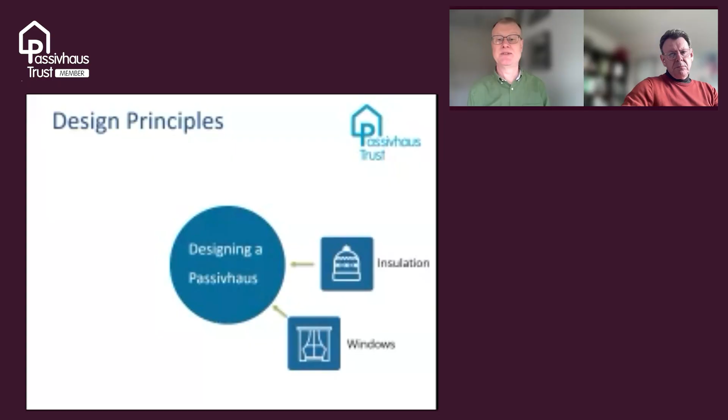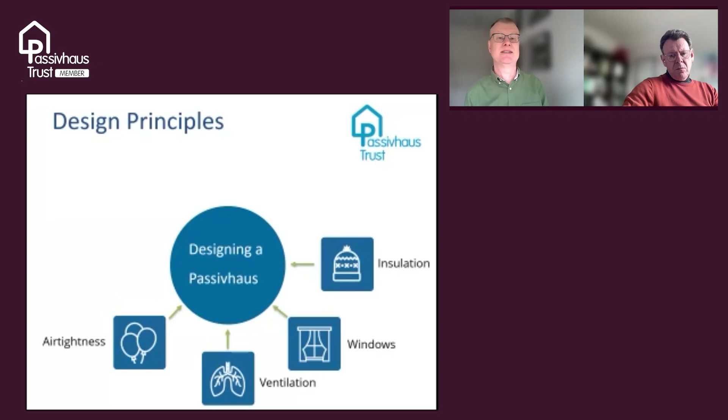A good ventilation system to make sure you've got nice quality air and you're trying to retain as much of that heat in the ventilation as possible, so you're not losing all that nice warm air out the window. Air tightness, really important, making sure that you're not having any heat loss through the drafts. But also, this means that the quality inside is much better, so there's less drafts, better control of humidity and other things.

Thermal bridging, this is one that's often misunderstood, and particularly important in terms of your retrofits. So this is where you've got elements of the building that might transmit heat from the inside to the outside through what's called a thermal bridge, which is kind of like if you have a concrete beam or a steel beam that runs from the inside of the building to the outside. Heat will just go straight through that bridge, and that will do two things. One, it will lose lots of heat and energy. The second thing is, it also means that surface temperature inside is going to be very low.

So if you had maybe a 1960s house with a concrete beam above your windows that is also expressed on the outside, you'll probably know that's the case because you'll have a nice moldy patch above your window where that concrete lintel just spans between the two, and that heat is basically being transferred straight out, so you've got a cold surface. So reducing thermal bridges is really quite important.

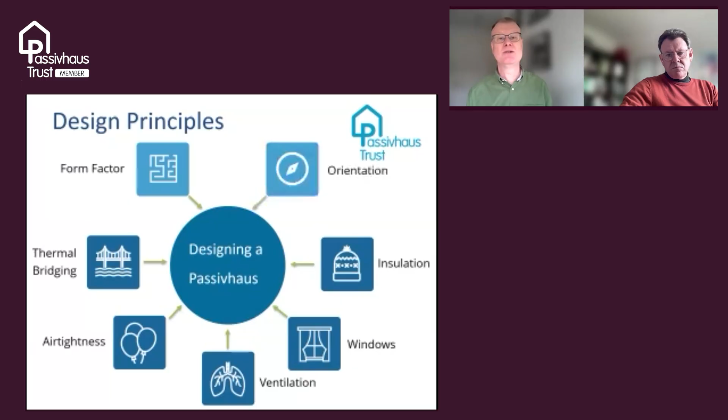Some other principles that you may not be able to do quite as much with if you're doing a retrofit compared to a new build would be things like the form factor, which is the shape of the building. Basically, it's the surface area that's losing heat. So the more compact the building is, the less surface area, the less heat loss. You can do a few things with it, but usually it's fairly limited with the existing building.

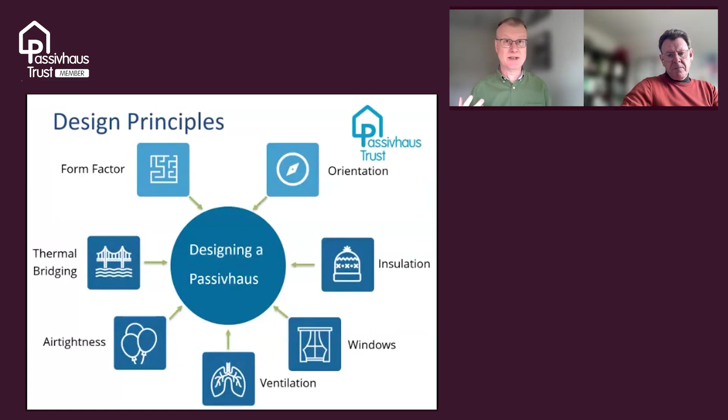And orientation. So ideally, you'd face the rear of the building to face south, not only just for solar gains, but also for keeping it cool in summer. But with an existing building, you probably can't do that.

So retrofit, really, really important. People might know this already. Ideally, by 2050, we're all going to be zero carbon. But all the buildings now are going to still be around.

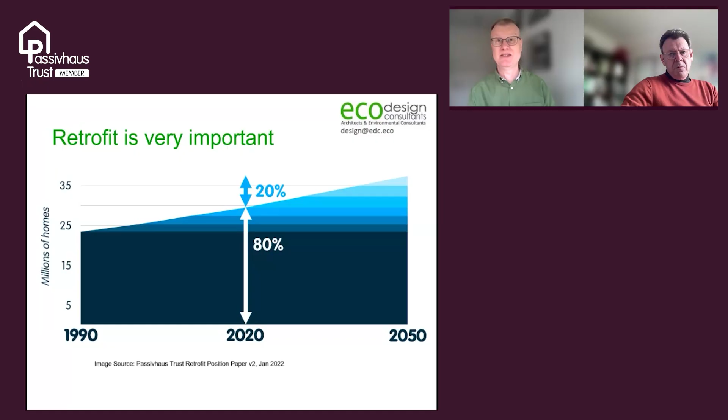80% of the buildings now are going to be still around in 2050. So we need to do something about the existing buildings as well as the new builds. In terms of performance, this is one of the things I really love about Passivhaus and why I'm such a great fan of it.

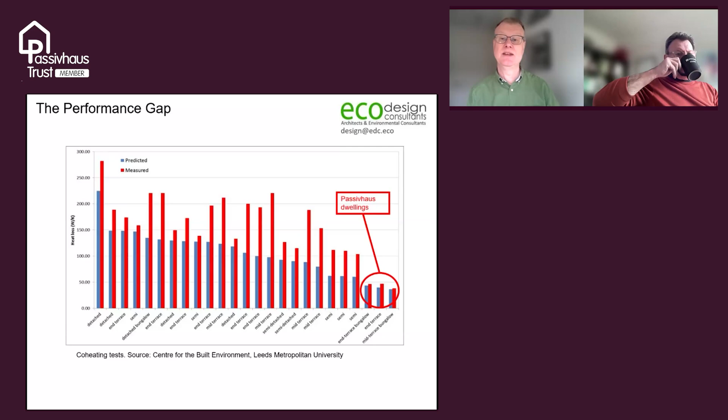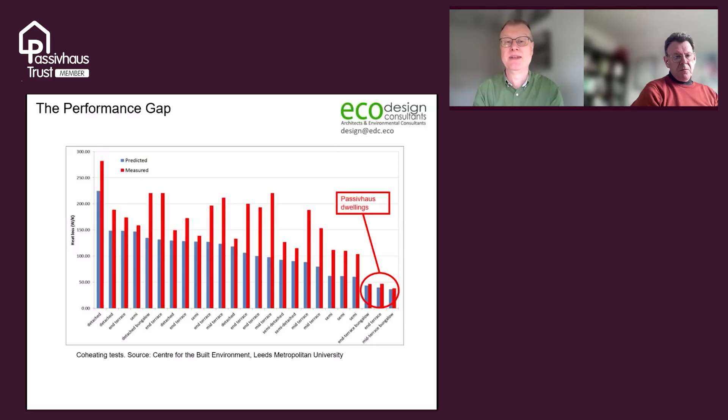But at the bottom corner, you can see the Passivhaus ones really much closer to the predicted, and also much, much lower as well in terms of overall energy use. So what's shown time and time again is that the Passivhaus methodology does what it says. And more recent studies by Oxford Brookes have also come out with similar findings to say that Passivhaus, in terms of the calculations, is much more reliable than some of the other energy calculations. So that's why we love the Passivhaus.

So a big question people often ask me in terms of retrofits is how far should we go? Should I just do a shallow retrofit or should we do a deep retrofit? So a shallow retrofit is when you might just do a bit of extra loft insulation, little bits here and there, basically. It can be good in terms of getting your carbon reduction down, but it has limited benefits to the health. Like I said before, it's about trying to get the surface temperatures up and stuff like that, but it just won't do unless you go for the more deep retrofit.

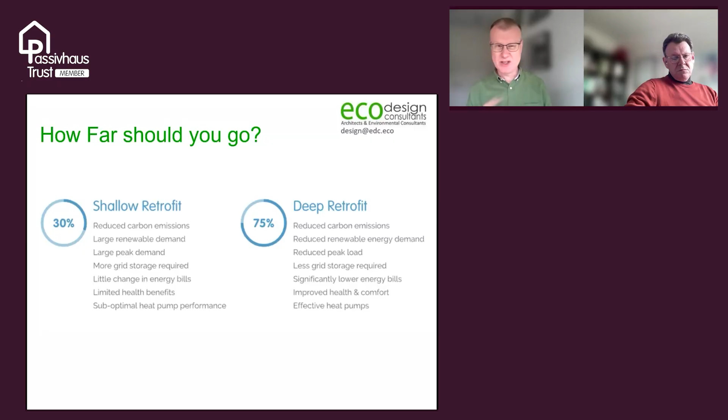Also, in terms of deep retrofits, you get much better in terms of a community, in terms of reducing power loads in different times of day and between summer and winter. So it's much better in terms of the country overall if we went for deep retrofits, but I won't go too much into that now, to be honest. We can talk later in the questions.

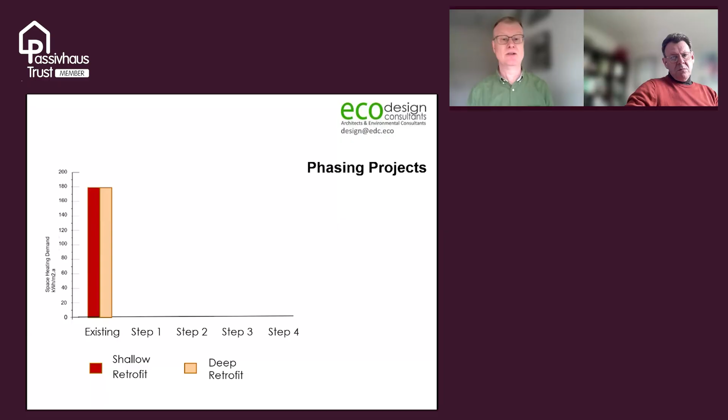So for me, what's really important is, first of all, having a whole retrofit plan, but then maybe phasing it. So for me, like in my house here, I couldn't afford to do the full deep retrofit in one go. So the options were either a shallow retrofit and being locked in, or going for a deep retrofit and doing it in stages. And that meant that I could keep going and doing stuff. So it's much better in my mind to do one item well and not have any regrets.

So for instance, if you're doing external wall insulation, putting on the full 200, 250 millimeter insulation now, rather than going for 60 millimeters, because that's the most economic and you can afford at the time. Because then if you want to do it later, you're going to have to redo all the render and all the rest of it, which is, to be honest, the majority of the cost.

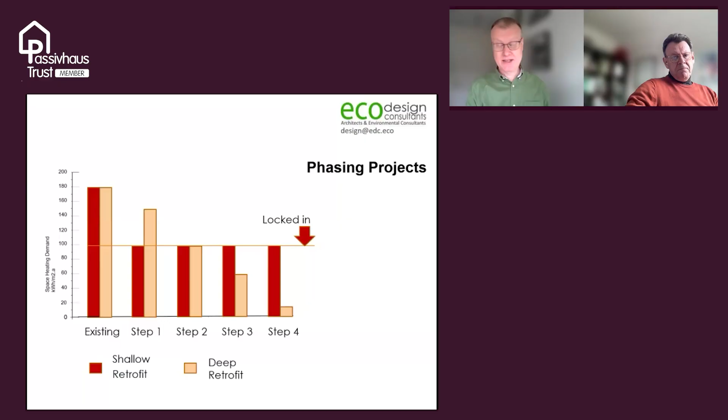The actual cost of going from 60 mil to 250 mil isn't that much. It's mostly involved with the material costs. So it's not a huge step up from that lower level. So it's much better to do each individual item well than lots of separate bits to a lower standard.

So going into the whole house plan, and I will go into some project stuff very soon, you'll be pleased to know. So if you look at our process, you can download this from our website.

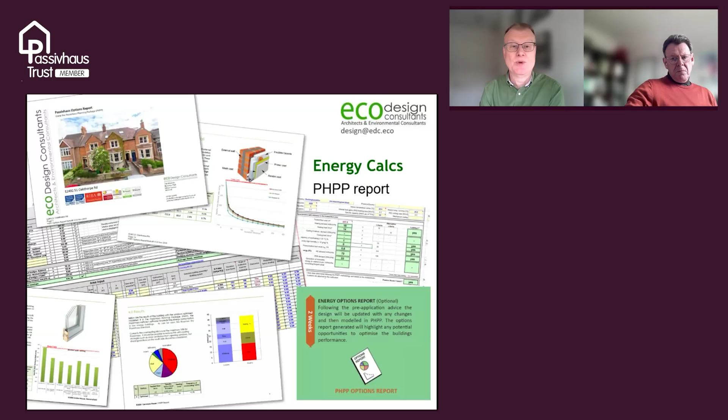So Guy's and Susan's house. So we gained planning permission and we provided a comfortable and healthy house with low bills. So a quick video now, hopefully this will work. So this is Guy's house as it was originally from the outside, and inside you can see fairly standard. They moved in just over Christmas, you could tell, and the back garden slightly overgrown. So a fairly standard terrace house.

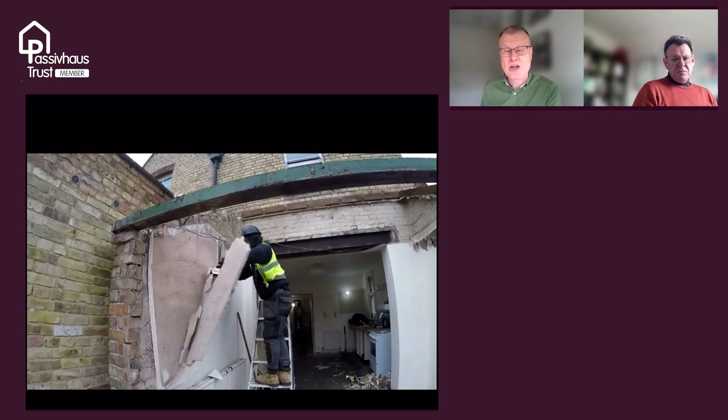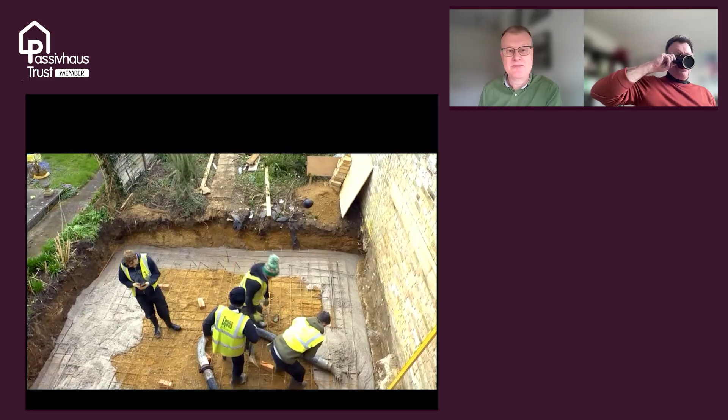So we pulled down the rear extension, which wasn't very good. One of the reasons for doing that was to fill up that silly gap between the extension and the neighbour's house, so that was losing heat and space, and was one of the changes we did from the original architect's drawings. So the foundations are going in there, the rear. Some structural beams we moved up, particularly in the basement where the ground floor was quite low. So moving the beams up was helpful.

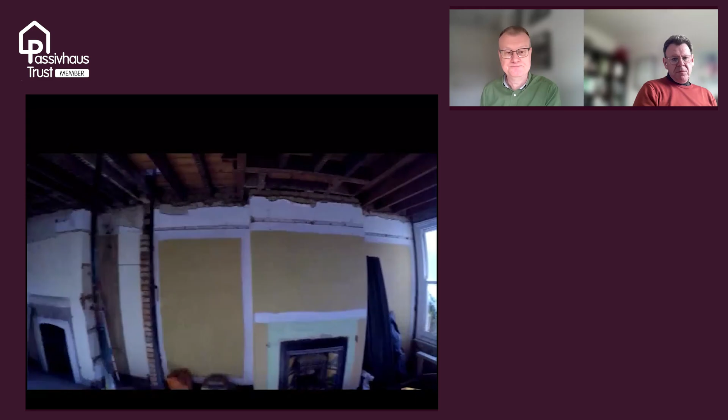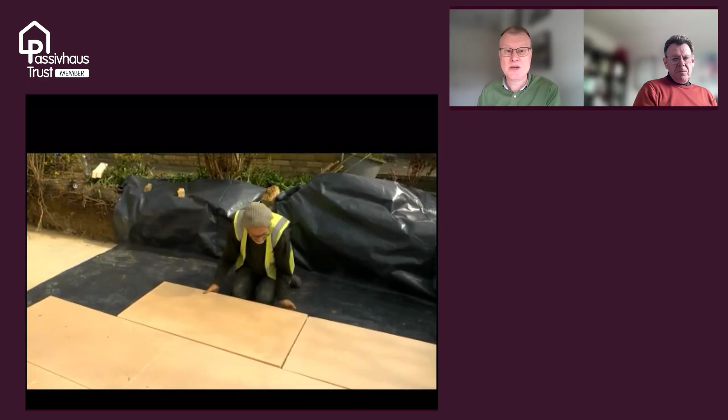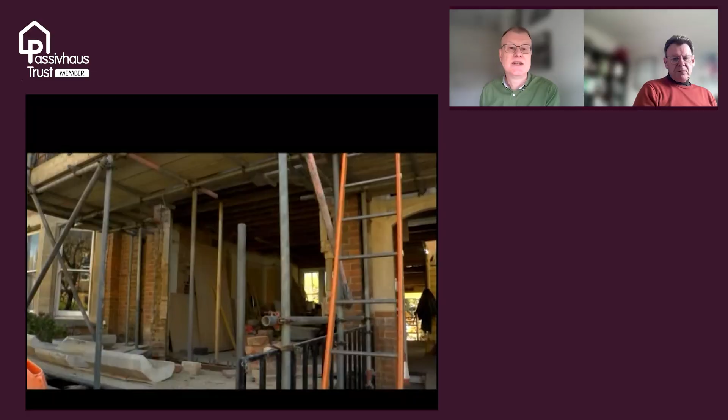Stripped out the house completely. You can see there all the brickwork back to original. Some of it, including that front bay, wasn't particularly great. Here you can see some of the insulation going in for the floor of the extension, the roof being amended, and the extension going on. So at the front, you can see there the bay window had to be completely rebuilt because once we opened it, stripped it back, it just wasn't structurally safe. So it ended up being rebuilt.

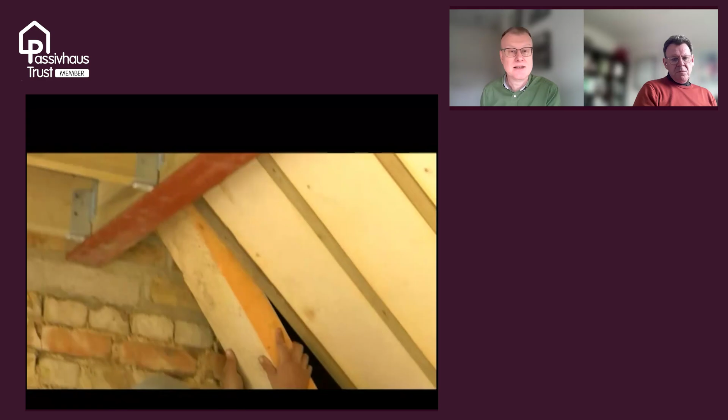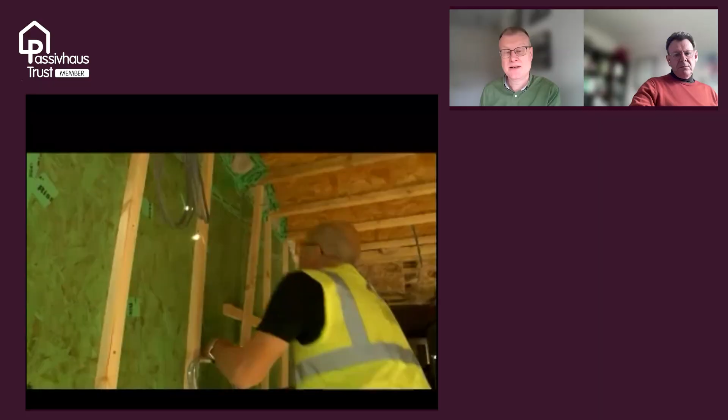Small extension on the back, some insulation going into the roof. So slightly different strategies for the front roof to the back roof because we need to keep the insulation level at the front and at the back. On the walls, inside the front walls, we used a combination of lime and cork render, wood fibre and a lime plaster. Ventilation going in, some air tightness tapes. So the rear, you can see a green air tightness board there at the back and lots of air tightness tapes. The windows being replaced.

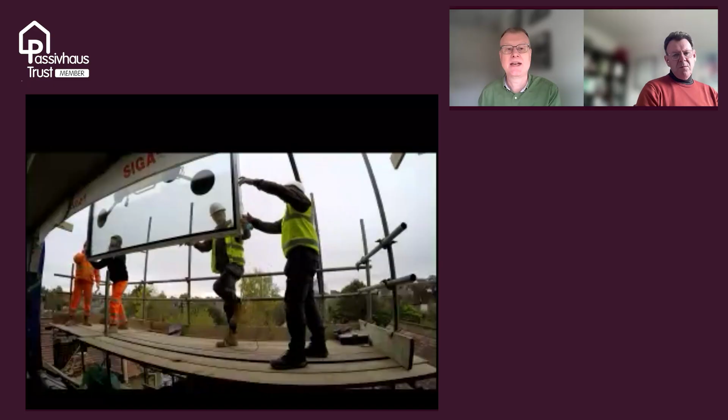So these going into lovely new triple glazed windows. You can see them going in there. So though they look like sliding sashes, they're actually open at the top, but look fantastic. And you can see the windows there in place and the wood fibre insulation going in. At the rear, at the back, we had a large glazed window that had to be craned in. You can see it going in.

So this is the top floor bedroom looking out the back, finished kitchen, finished living space, which we opened up through to give a lovely space, and a view out the rear extension from the dining space into the back garden. That's a quick whistle stop tour.

Okay, so just moving on to some of those points in detail. So we often talk about Passivhaus as 5 principles. So here I've got 8 principles. So I'm going to quickly go through what we did on each of the projects. So number 1, the insulation. So you can see here the rear extension, which was a timber frame with mineral fibre insulation going in between the studs. So it's a big duvet over your house. Not necessarily as much as people think to the Passivhaus standards.

So if you're doing a new build, it might only be a little bit more than current building regulations. But compared to an existing house with no insulation, obviously quite a lot of insulation going in. To me, it's important what insulation you pick. And there's a whole topic that I'll talk about in terms of what insulation goes where. But you want to make sure of a couple of things. One, it's continuous. You don't want gaps.

Often we think that soft insulation is easier because it can squash into those gaps, as you can see there. And it's really important to make sure you get what you're asking for, because you need to check the thermal conductivity or the lambda value to make sure it's the type of insulation that you want to use and you aren't getting something less performing.

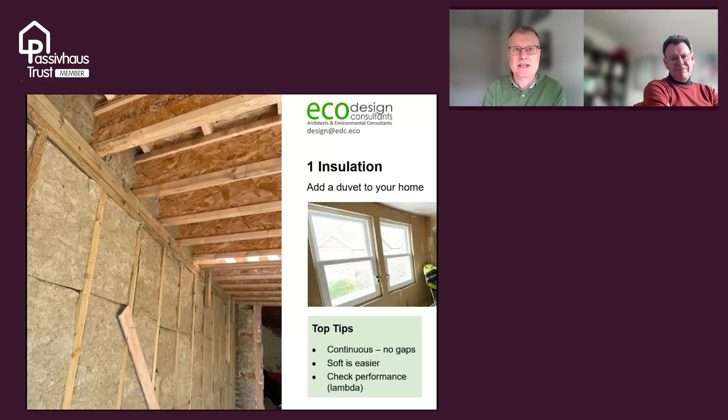The second thing is efficient shape. So it's very important that you look at what I called earlier the form factor. So just a quick example there, we've got a mid-floor flat and a bungalow. If you opened up those buildings and showed what the heat loss area was, the bungalow there has 279 meters squared of heat loss area. And the flat, because it doesn't lose heat to the flat below and the flat above or to the communal space, has only got 74 meters squared of heat loss area.

And both of those properties are built to current building regulations, same U values, same everything else. The mid-floor apartment is 2,000 kilowatt hours to heat. The bungalow, 4,500 kilowatt hours to heat. The only difference is the shape of the building. You can see clearly the bungalow requires over double the amount of heat. So making your building as compact as possible really does help in terms of reducing your fuel bills.

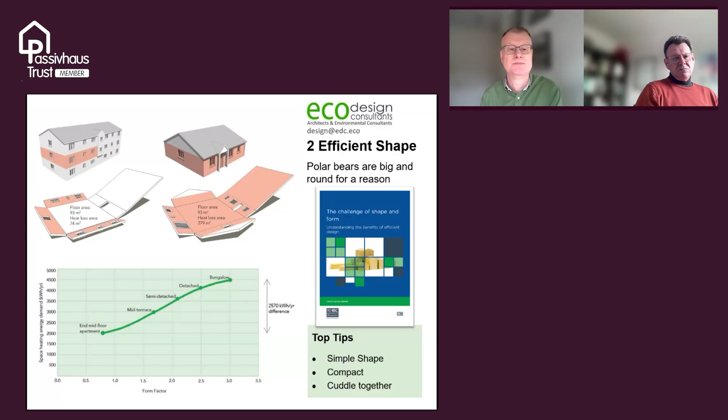So on Guy's project, you can see here, this is the new rear extension that was rebuilt and extended at the back. One of the things we did, which you could see briefly in the video, was we built it right up against the neighbours. So we used the party wall. We didn't leave what I often think of as a silly little gap between your extension and your neighbour's extension, which will just fill up with leaves and cause damp problems, but also hugely leaking moisture and heat. So that was one of the large changes that we could do to make it more efficient.

Other things we often do are things like the location of the front door. This one is recessed, but we felt it was undesirable to move it to the front surface because of the aesthetics. Often we would move that front door, the thermal envelope, right to the face of the building to reduce those losses.

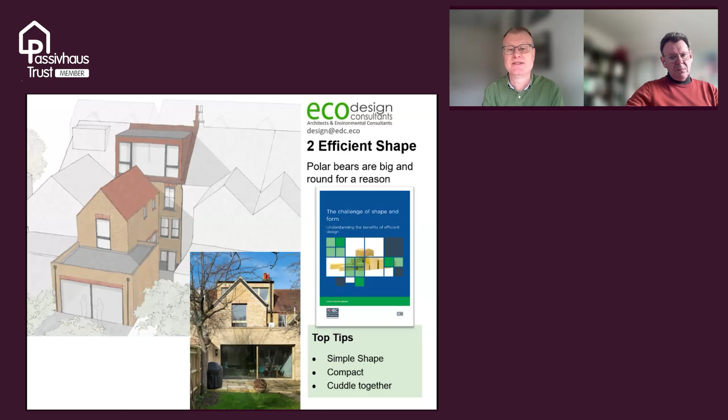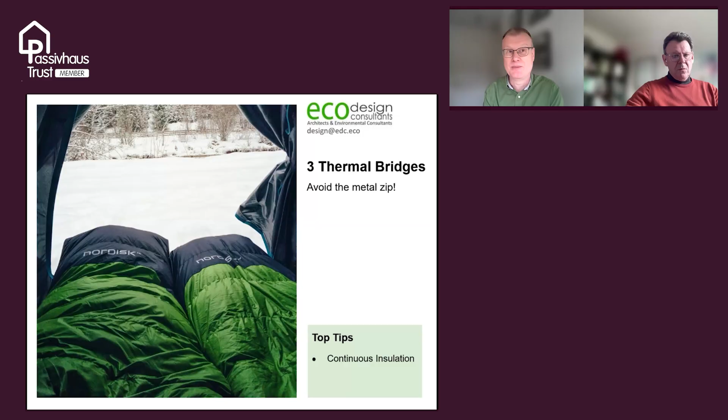Third item here is thermal bridges, which I spoke about briefly in terms of the steel. Some of you in the audience might remember the old sleeping bags with a metal zip, which was horrible. That is a thermal bridge. Now plastic zips help reduce that thermal bridge. In houses, those thermal bridges can be all over the place. Typically insulation is soft and squidgy and not so good in terms of structure. So typical difficult areas are around the foundations, around the roof, areas where you need structure as well as insulation, and just try and keep that continuous insulation.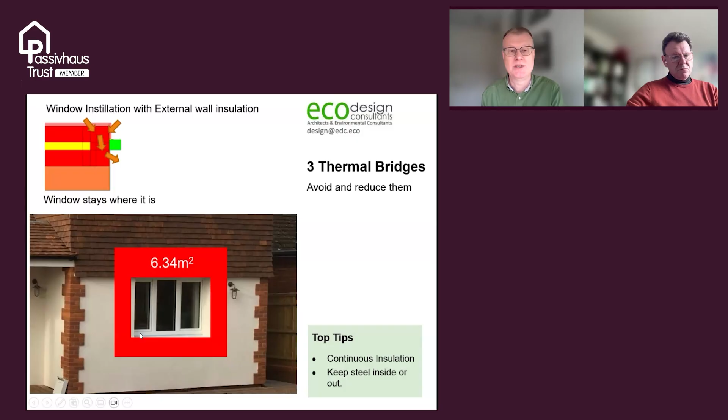So 6.34 meters squared around that window. So it's a huge area of losses compared to if you did move it out. So if you moved it out into the insulation, reducing that thermal bridge and reducing the surface area of the building, that then reduces down to 0.34 meters squared. So you can see a huge difference in terms of energy losses.

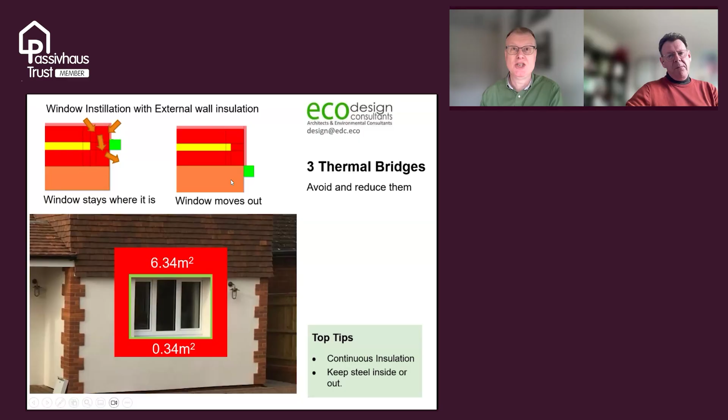But to be honest, to me, what's much better is that internal surface temperature. So there's the reduction in terms of risk of mold and condensation and discomfort really from the inside. So these sort of details really make a huge difference in your retrofit and are really important.

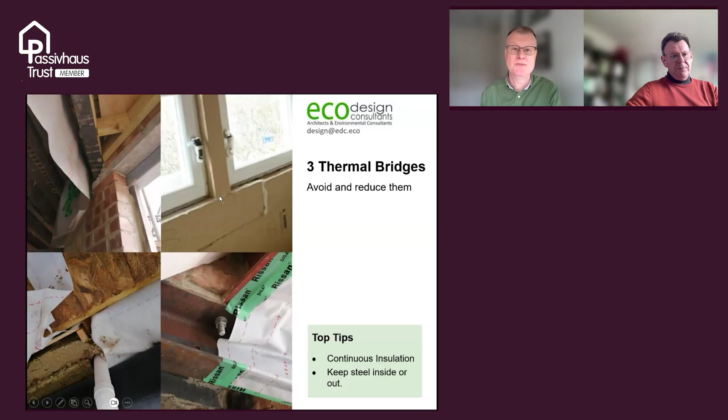These are some of the examples of what we did within Guy's house. So lots of it's where the steel was, so some complicated details that needed detailing. You can see here the windows with the wood fiber insulation going on, wrapping over the frame to make sure that the insulation and the window frames really do join up.

So point number 4, drafts. So this is about your air tightness. This is about making sure your building is airtight. But one of the important things to remember here is moisture movement. And moisture is really one of the enemies within your building, and particularly with the retrofits you need to be careful how this works.

So getting this to work is, to me, a bit like comparing the old cagoule with the new Gore-Tex coat. So the old cagoule, you go out walking and you'll be really sweaty and damp inside your cagoule. If, however, you now have a nice Gore-Tex coat, it will let moisture through. So water vapor is a smaller molecule, and that will be able to go through small holes, whereas air and heat, which is a bigger molecule, is trapped inside and won't get through.

So a lot of membranes and other building materials are vapor open. So that allows water vapor through, but it is also airtight. So it doesn't mean that heat and air can go through. So some nice clever membranes and stuff we use now. There's also things like lime plasters and a lot of the natural materials which are actually vapor open and also airtight. So it's not necessarily using plastics and other things like that.

So we do need to be really careful about the materials we use in terms of how moisture moves backwards and forwards through the construction. And that's something I really need to stress in terms of what you're trying to do in the retrofit. Particularly, I would discourage people using things like insulated plasterboard on the inside, which is vapor closed, which won't allow that moisture through in the way it needs to move between inside and outside at different times of year. Sorry, I'll get off that soapbox now and move back onto the air tightness.

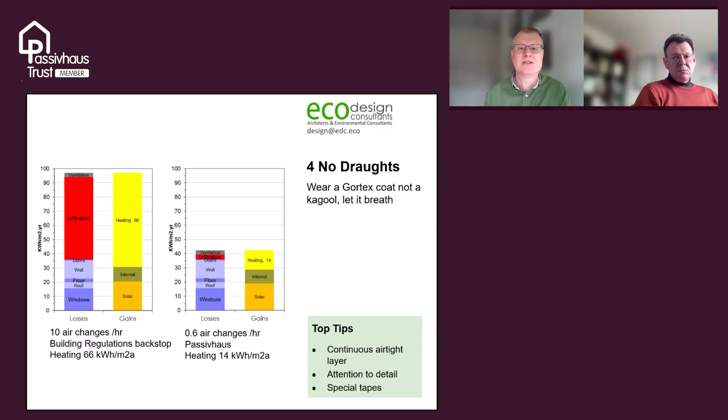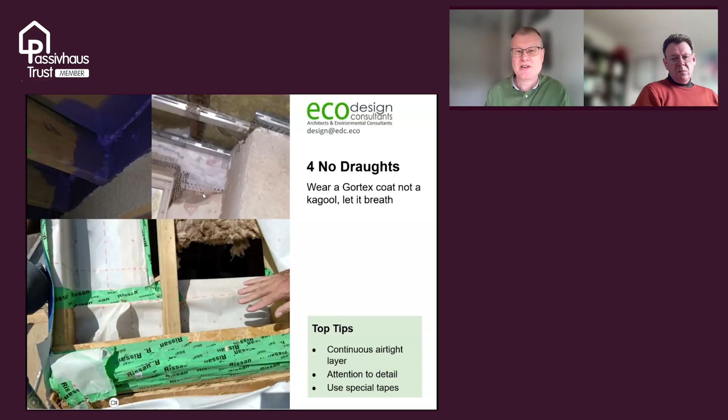And here you can see some of the other membranes and tapes. So this is one that you can plaster onto. So this is where the membrane was then taped to the wall. And then that allowed us with the lime plasters to be taped onto it and make sure we've got a continuous airtightness layer. So it's really important to use the right materials in the right places and think through the strategy. So once you've done that, you basically need to test it.

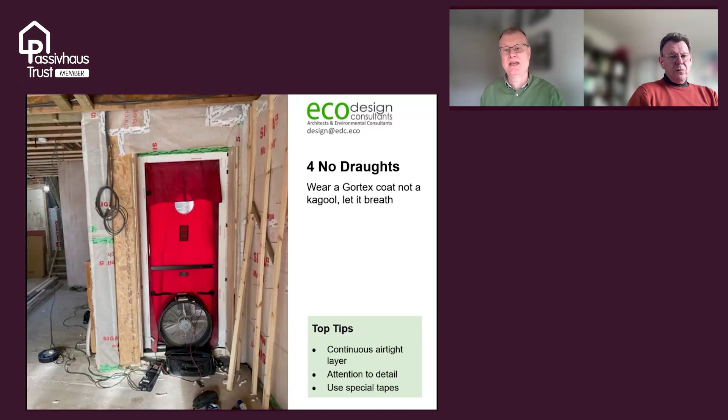So here you can see the rear extension. You can see the airtightness membranes and the tapes around the building. And so what it meant is that when we do the test, we can go round and we can find holes. And if you find a hole, we can tape it up and put it right. And we can keep doing that till we get down to the level we need to.

So once you've got a nice airtight building, it's really important to make sure you've got good quality air. Because obviously, if it's an airtight building, you will breathe out and carbon dioxide will come out of your mouth and you'll build up carbon dioxide in the building, which can be dangerous after a long time, but only a very small amount. And it's days before it becomes really dangerous, even in the most airtight building, but we won't go into that particularly. So you need to have what's called mechanical ventilation with heat recovery.

What happens is the stale air and the fresh air pass next to each other, and about 80 to 90% of that heat is transferred from the stale air to the fresh air. So what that means is the air might be 0 degrees outside and 21 degrees inside. As it goes through the machine, the fresh air coming into the rooms might be up to 1 degree less. So if it's 21 being extracted, it might be 20 degrees being supplied into the rooms, but not the 0 degrees of opening the window.

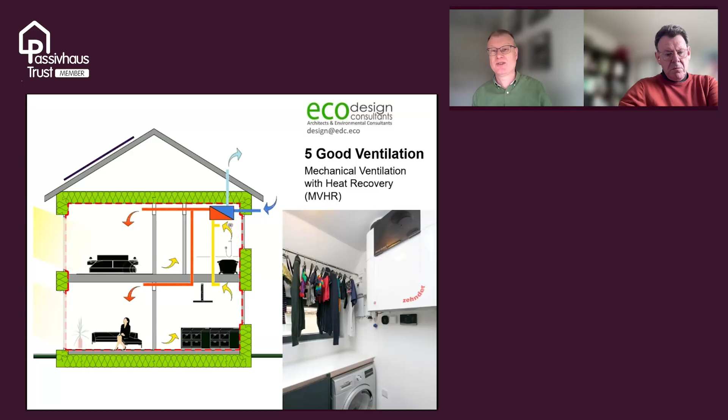A similar thing works in summer, and it can help either bring in cold air from the outside or use it as a heat exchanger to keep your house cool as well. But I won't go too much into that today. Often people think that putting in rigid ducts around the house is quite difficult. And so there's lots of ways we hide them away.

So the hallway here, you might spot is slightly different, and we have a slightly dropped ceiling in the hallway. That's to allow some ducts to come through, and we've got outlets above the doors on the first floor. So there's a few tricks like that we can do to try and hide away those ventilation pipes, which is often much easier than people think it's going to be in terms of the distribution of those ducts.

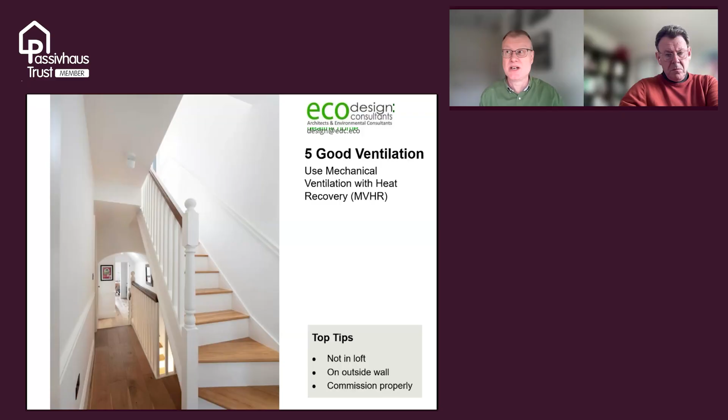Tips here: don't put your MVHR in the loft unless it's accessible. Put it on the outside wall because it's basically cold air coming in and out of it. So those ducts want to be as short as possible, and really do make sure you design and commission it well. The design of it is really, really important in terms of sound and other things, and that's where Passivhaus really shines in terms of its requirements and its quality checks to make sure that that works.

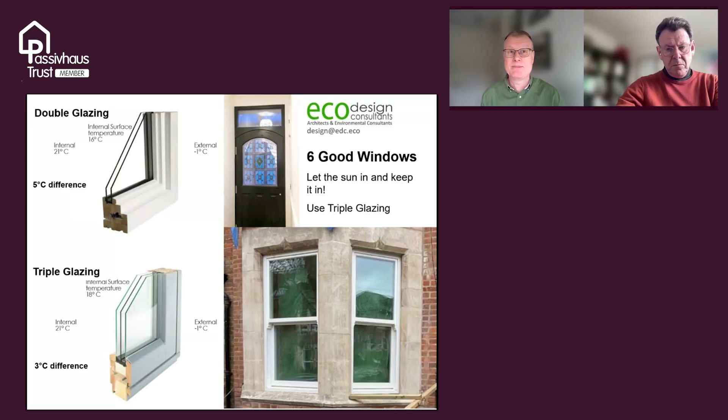One of the other nice features that we did with Guy, he had a fantastic old Victorian stained glass window in the front door. So we actually reused that and encapsulated that within the triple glazed new front door. You can see in the picture there.

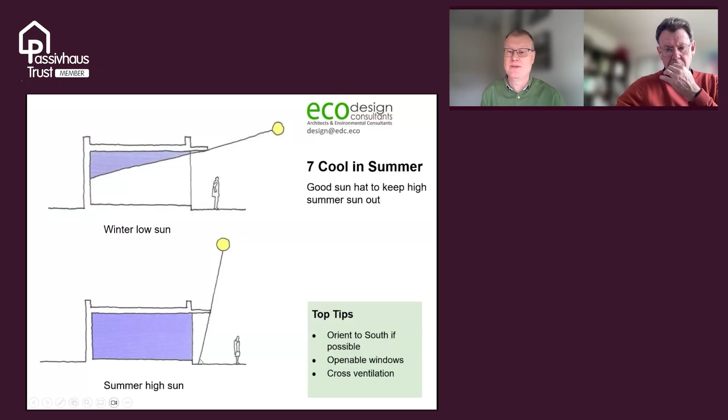Keeping cool is important as well as keeping warm. In summer, the building basically acts like a thermos flask, so it keeps things warm and cold. So one of the things you can do is you can try and use shading. So if your windows are facing south, you can have a shading device that lets in the low winter sun, but shades out the high summer sun. But also there's various ventilation and other things we can do.

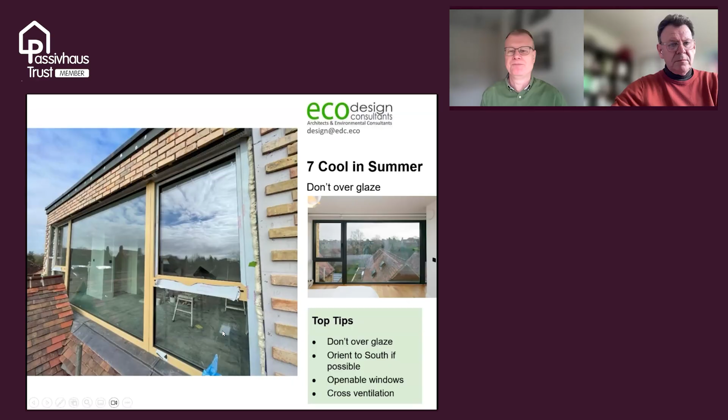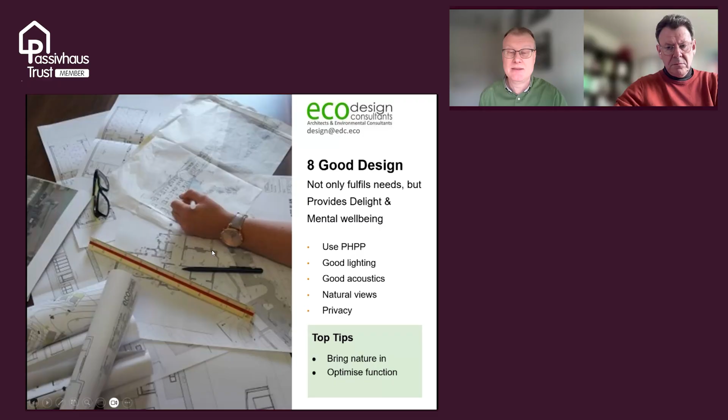So point number 8, it really comes down to design. I think taking the passive house stuff and the building physics is great, but you also want to make sure the building works functionally. Also look at good lighting, acoustics and views and all the other design things that you need to think about. So try and bring those all together. And I think it is worth thinking about those things and the future. So making it future-proof in terms of accessibility and other things. So maybe go a little bit further than just the standard passive house requirements.

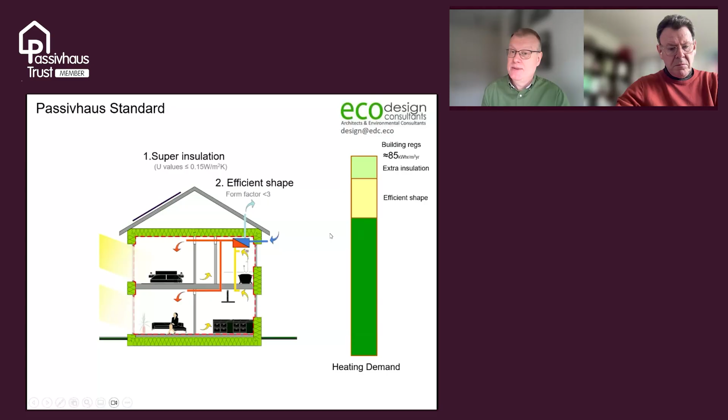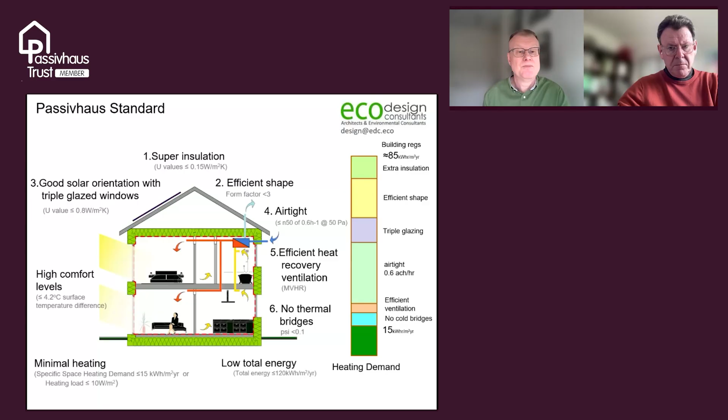This is for a new build passive house, but the retrofits are very similar. So you might start off with building regulations around about 85 kilowatt hours per meter squared per year. You add some insulation. You make it an efficient shape. You add triple glazing. You make it airtight, because it's a big jump there, getting the air tightness down. You make sure you use efficient mechanical ventilation. You get rid of those thermal bridges, and before you know it, you're down at 15 kilowatt hours and a passive house, and you've got high comfort levels, low energy costs, and really good comfort and well-being.

Thank you, Alan. That was great. Really lovely property as well, and it's amazing to see the transformation. So we have had quite a few questions, so hopefully we'll be able to cover off as many of them as possible in the 15-20 minutes or so that we've got.